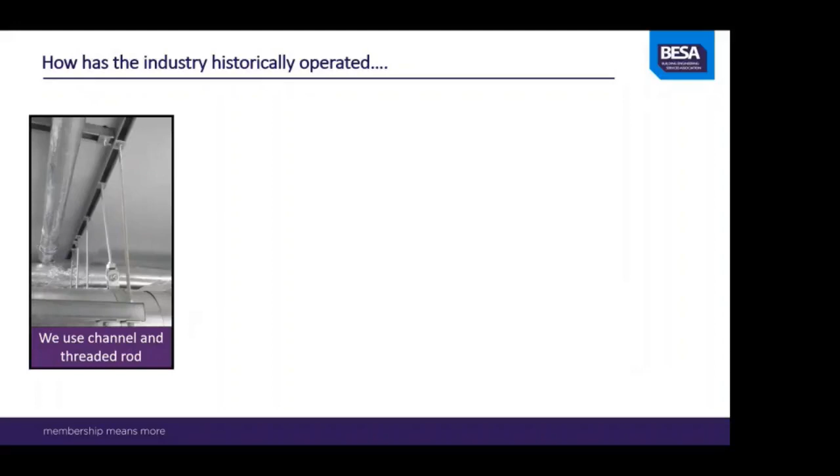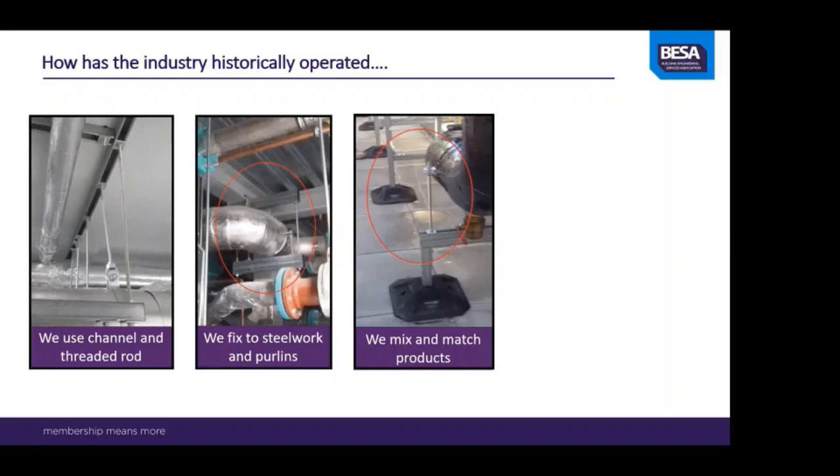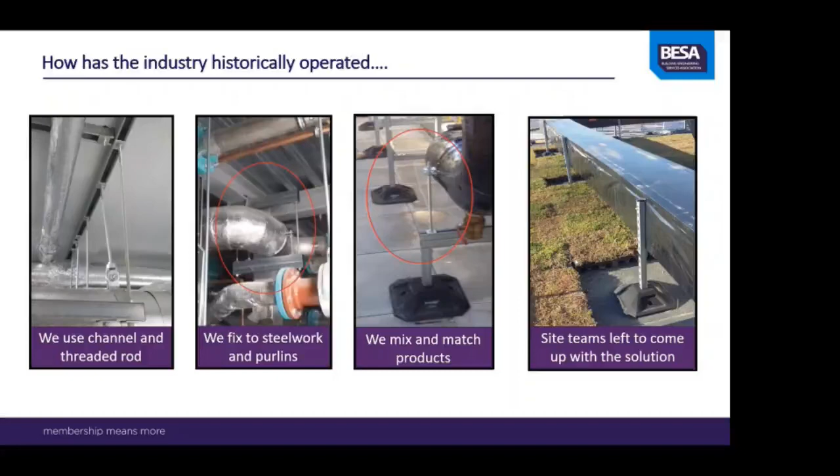We use channel, we use threaded rod. Do we understand what we're selecting and whether it's fit for purpose? We traditionally fix to steelwork and to purlins in roofs. Again, are we understanding the implications of doing that, the loads and so on? We often mix and match products without understanding whether they're tested together and what the performance of that system is. Crucially, site teams are often left to come up with solutions themselves without having the information, knowledge, or skills to make that decision.

So what does that all mean? It means we don't know what the applied load is. We don't fully understand the application. We rarely seek approval from the structural engineer, and therefore we can't prove that the selected supports and fixings, or the systems, are fit for purpose.

But you might be asking yourself, what does that matter and why is any of that a problem? Let's have a look at the reasons, or the need for change.

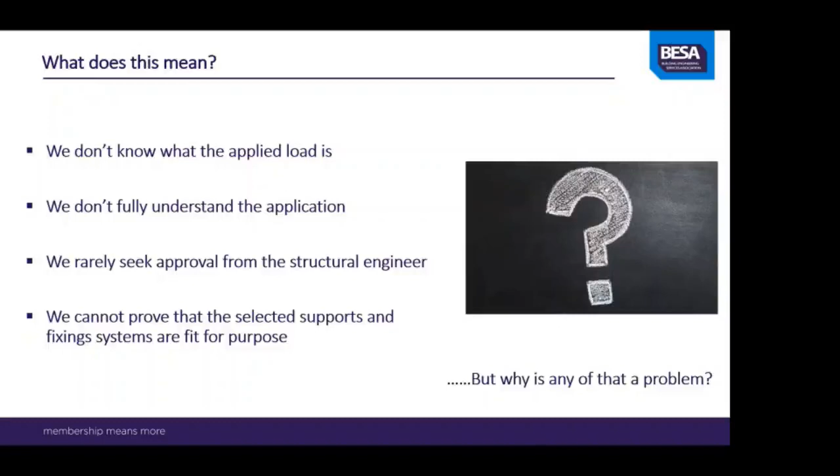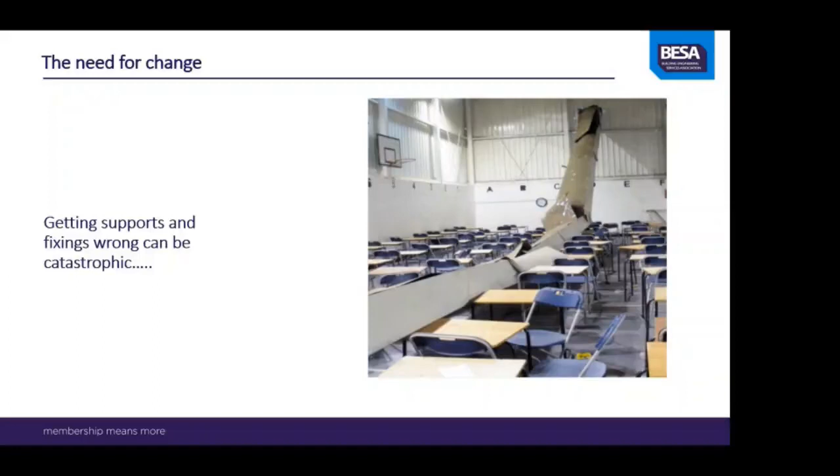Firstly is clearly safety. Getting supports and fixings wrong can be catastrophic. You may have seen this image before, but this happened back in 2009 - 12 school children were injured when a ventilation duct collapsed in a school hall during an exam.

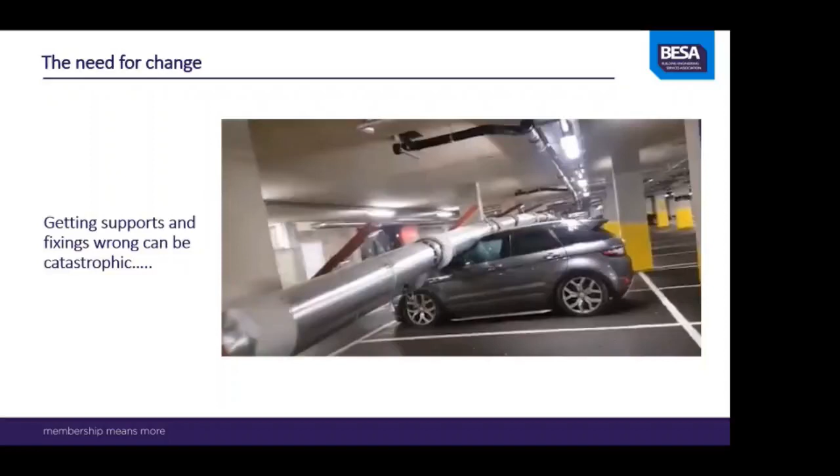The failure was later found to be as a result of inadequate supports and fixings generally. Likewise, you may have seen this image - this was floating about on social media about 12 months ago. The entire installation of a large diameter pipework system failed, and as you can see, it's caused significant damage. It was understood from the subsequent investigations that the fixings had been incorrectly selected, incorrectly installed, and that the selection was changed on site.

But why else do we need to look at change? Well, the second reason, in my view, is around the subject of cost and reputation. Clearly, if that had happened to your company or a project you've been working on, there's going to be significant cost associated with that.

But I think more importantly, the reputational damage that it would create to everybody involved is substantial. The third reason, I'd like to introduce you to a British standard, BS 8539. This code of practice has been around for nearly 10 years, and it addresses the selection and installation of post-installed anchors into concrete and masonry.

It's not just the construction industry, it applies to all sorts of sectors, but it sets out a framework for design, selection, installation and testing to ensure there's a full audit trail throughout that entire process. And that's something that is very much coming to the fore in the construction industry.

And lastly, for me, is around due diligence. If you were a client on a project, for example a data center or a manufacturing facility, you'd be within your rights to ask the contractors and design team to prove that the supports and fixings supporting, say, heavy pipework above a data hall have been correctly designed and can be evidenced.

Now, supports and fixings may not be uppermost in the mind of construction professionals during the initial design stages. However, it's important that certain aspects are addressed by the designer at this stage. It's the responsibility of the mechanical designer to calculate the weight of building services systems in order to obtain approval from the structural engineer that the building structure can support the weight of the MEP services design.

Specifically, there are two areas of this. First of all, there's suspended services. Structural slabs are usually designed with allowances for suspended services. However, there have been examples, particularly in heavily serviced buildings, where this hasn't been the case and they've actually been overloaded.

Other examples are where you've got a heavily serviced building that might be in a lightweight steel frame structure, a data center or perhaps a manufacturing facility being good examples.

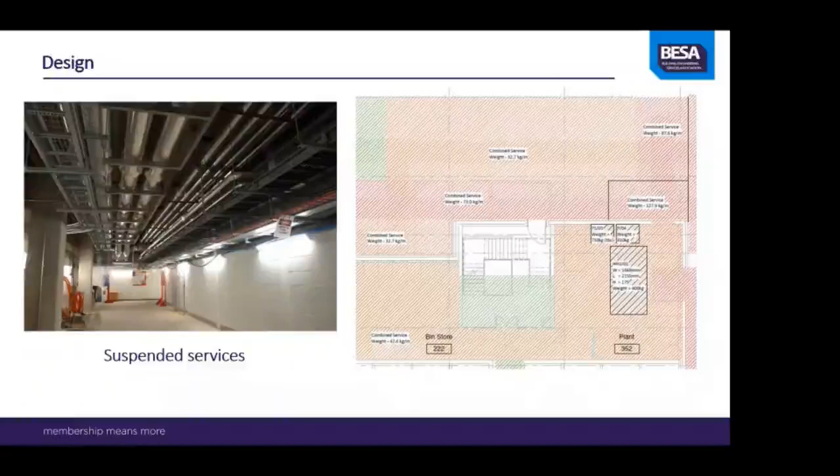And the other area of design is particularly around roof plant. So for roof mounted plant and equipment, designers should be obtaining confirmation from the structural engineer that the roof structure has been designed to accommodate the weight of heavy items of mechanical plant, including where applicable, any requirements for plinths or upstand details. It may also be necessary to restrain roof mounted plant and equipment depending on the calculated wind and snow loadings.

Now, there have been examples in the past that I've been aware of, particularly in design and build contracts, where MEP contractors have ended up taking responsibility and the structural design hadn't made sufficient allowance for roof mounted plant. And there are other examples where they've been left footing the bill for significant amounts of secondary steelwork.

So this evaluation should take place at RIBA stage 2, and no later than RIBA stage 3.

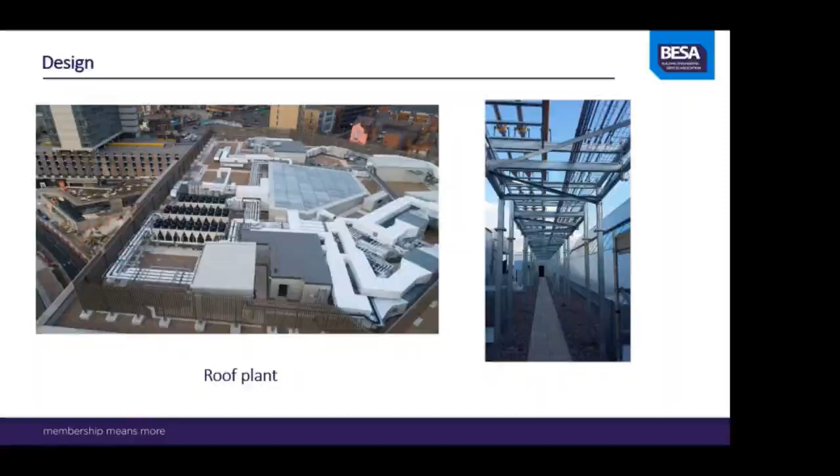Okay, moving on now to specification, and particularly the importance of the correct specification. So supports and fixings, products and systems should be specified in collaboration with structural engineers and the fixings manufacturers, to enable them to be correctly selected and specified. The following factors need to be considered.

Firstly, loading. As we've just talked about, it's really important that loading is calculated accurately by the designer. That should include things like, if it's pipe work, the weight of the water in the pipe work, the insulation, and ideally the self-weight of the bracket. I know that through the increasing use of Revit software there are capabilities to be able to do that. But it's something I think is really important, that even in a design and build project, the designer should be advising on the weight of the services.

The next issue is base material suitability. Now, BESA TR50 provides guidance on this, and it includes areas such as a definition of cracked and uncracked concrete, what that is, fixings to purlins, and also fixings to composite metal deck floors.

Environment is another thing that needs to be taken into account. So certain environments, good examples being swimming pools, external plant areas, any building near the sea, or perhaps in a tunnel, you're going to have enhanced corrosion requirements, and that needs to be taken into account when you're specifying the support and fixing system.

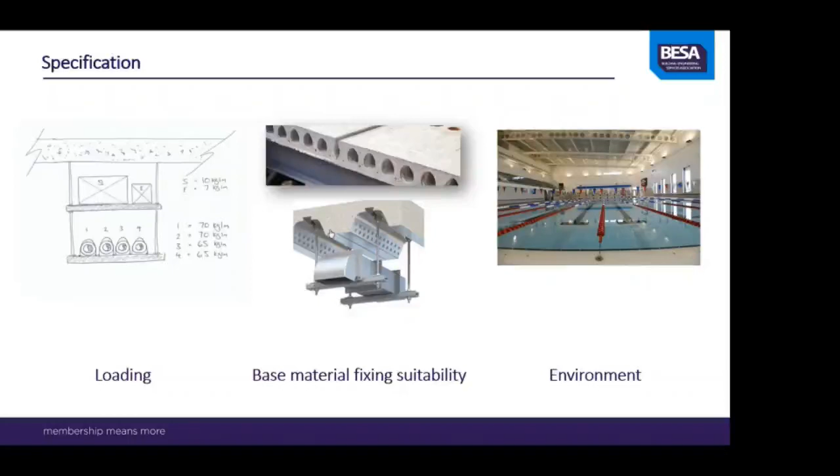Now, the next thing in terms of specification is the subject of fire rating. For specific applications, it may be a requirement to ensure that supports and fixings are specified to be able to withstand a prescribed fire exposure, period or rating.

Now, this is touched on in the guide, and it's very much an evolving subject in the industry at the moment. There isn't a single specific UK test standard that covers fire ratings of supports and fixings as a single entity. There is guidance that talks about the fixings or the anchors into the concrete, and guidance in relation to the drop rods, but there's nothing that talks about it as an entire system. That's something I think is desperately needed, and certainly at BESA we will be looking at that over the next year or so.

In TR50, it does give some best practice examples of where fire rated supports and fixings will be required, and provide some considerations and watch points.

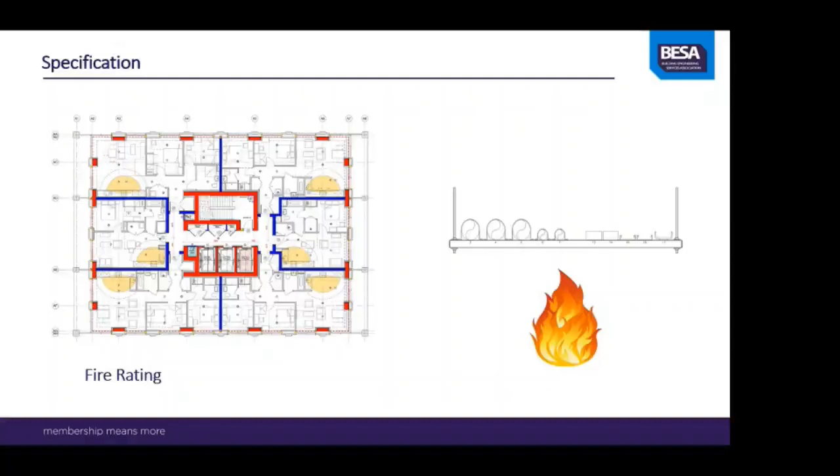So these include, firstly, supports for power supplies to life safety, firefighting and other critical applications. You may be familiar with BS 8519, which has a requirement that the supports for life safety power supply should have a survival time equal to that of the cables it supports, for the same defined fire conditions.

Now, there are two options for approaching this. You can either split out the life safety supplies into a separate containment system, as shown here, or if it's a single module, which is commonly used in DFMA processes these days, you would need to look at providing a fire rated support and fixing for the entire system.

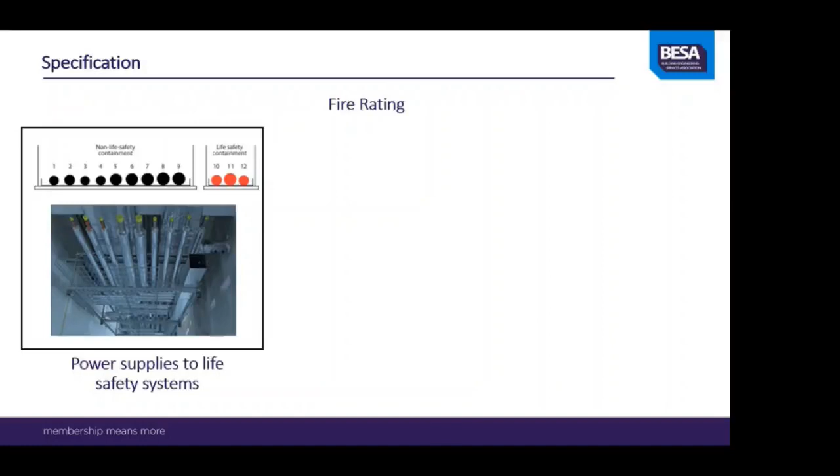The second area is supports either side of penetration seals. So fire stopping and service penetrations either side of compartment walls should always be part of a manufacturer tested and approved fire stopping solution. That will have a requirement that the support either side of that, typically no more than 500 millimeters, should be fire rated as well.

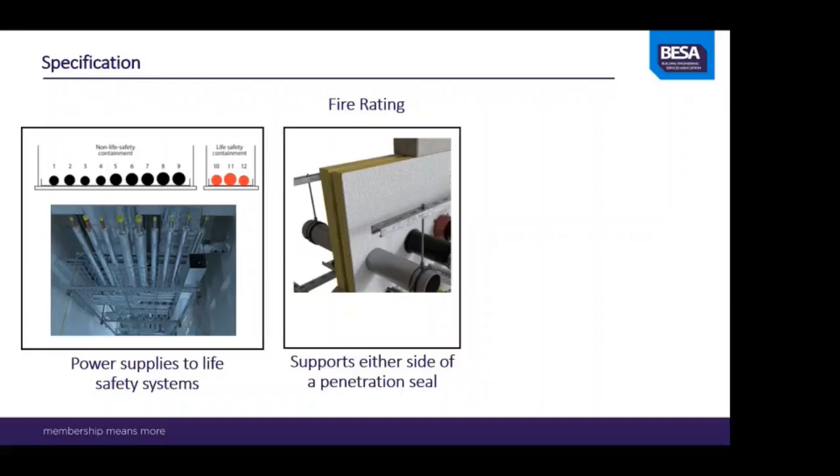And the third area of fire rated supports and fixings is designated fire escape routes. So for example, if you've got a fire escape corridor that has a 60-minute or a 90-minute fire rating.

Now, this is very much a contentious area because there is a school of thought that says if you've got a designated escape route and you've got services in the corridor above that, then by definition, there will be no fire load in that escape corridor. Therefore, why are we looking at fire rating the supports and fixings? And I think the key message here is it needs to be looked at on a project by project basis, and it may well be that you could come up with an engineered approach.

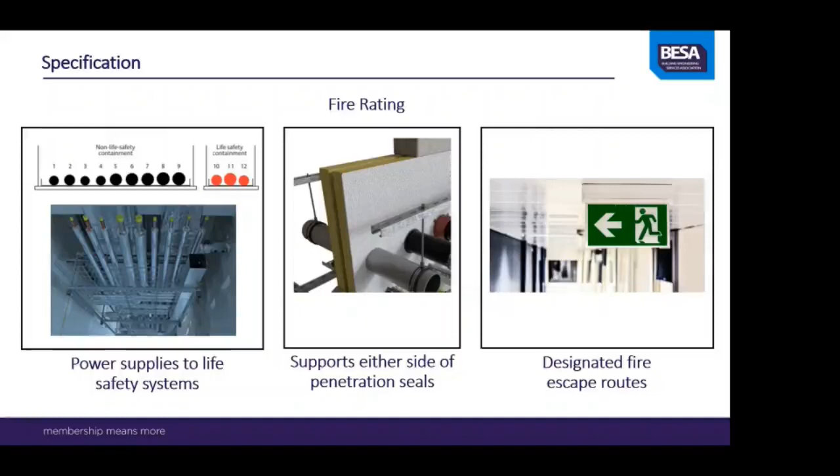Okay, so moving on to support spacing. Particularly for pipework and ductwork services, the spacing should be provided in line with manufacturers' recommended support distances. So in the absence of any specific information, vertical and horizontal supports for copper and steel pipework can be based on BESA guidance in TR50, and ductwork would be DW144. So where you've got a multi-service bracket, the support spacing should be based on the service with the most onerous requirement, which typically might be a copper pipe.

Thermal expansion. Now, in addition to static loads, pipe movement as a result of thermal expansion and contraction may also impose additional active loads onto supports. And that is really very much dependent on the pipework expansion design strategy, but it's something that may need to be thought about when you're looking at the support and fixing system.

And finally, in terms of specification, is the subject of approvals. Now, BS 8539, the concrete specification we talked about earlier, has a requirement that wherever possible, ETA rated anchors should be used for any fixings into concrete. Now, ETA stands for European Technical Assessment, and essentially this is a harmonised standard which is used by all reputable fixings manufacturers. And as part of that testing process, they've tested their fixings and anchors into various substrates, and they're therefore able to publish the performance data for those particular anchors, and that should be used as part of the selection process.

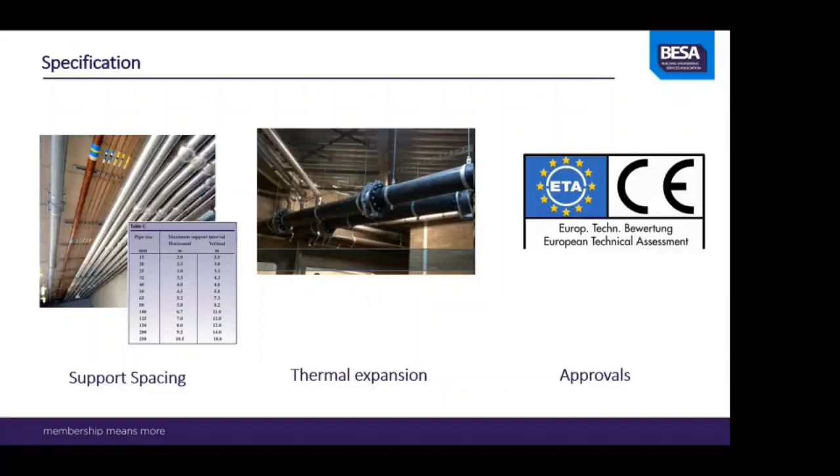Moving on to installation. Now, this may not be something that as mechanical designers you necessarily get involved in, but I think it's important to have an awareness of this subject. So it is essential that installers undergo manufacturer-specific training before work commences. This may take the form of a toolbox talk on site, although some fixings manufacturers have developed very good online training videos.

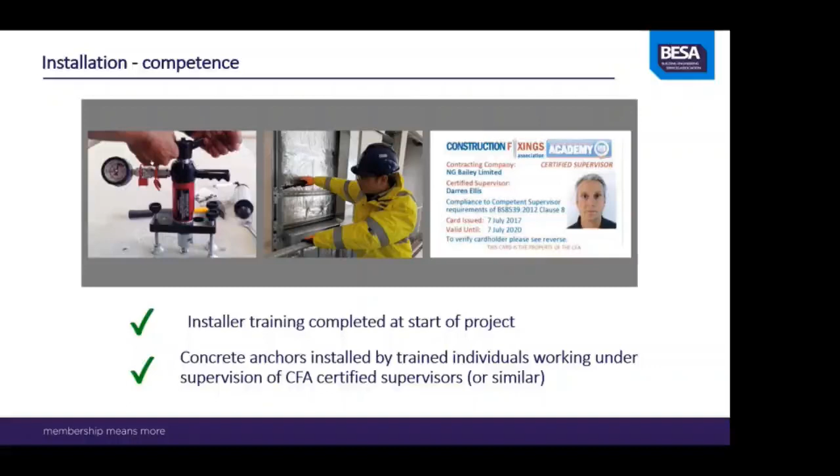Now, for fixings into concrete specifically, again, referring back to BS 8539, it's a requirement that all anchors are installed by trained individuals working under competent supervision. Now, in order for somebody to be deemed competent, according to the 8539, they should have undergone and completed a competent supervisor training course, such as that delivered by the Construction Fixings Association, as you can see on the screen. Okay.

Now, sticking with installation, I wanted to talk about torque settings now. Many of the support and fixing systems used in building services actually have specific torque settings that will be specified by the manufacturer. Now, this isn't, in my view, something that the industry has done at all well. If you think of the automotive industry, or if you're a cyclist, you'll know about road bikes, and there'll be specific torque settings for different components. And essentially, why should our industry be any different?

So examples of products that have specific torque settings include beam clamps, channel nuts that are used on framing systems and trapeze rods, fixings to purlins, beams and metal decks, and torque controlled fixings into concrete. And it's important that when these are installed, it is evidenced that these have been torqued to the correct setting.

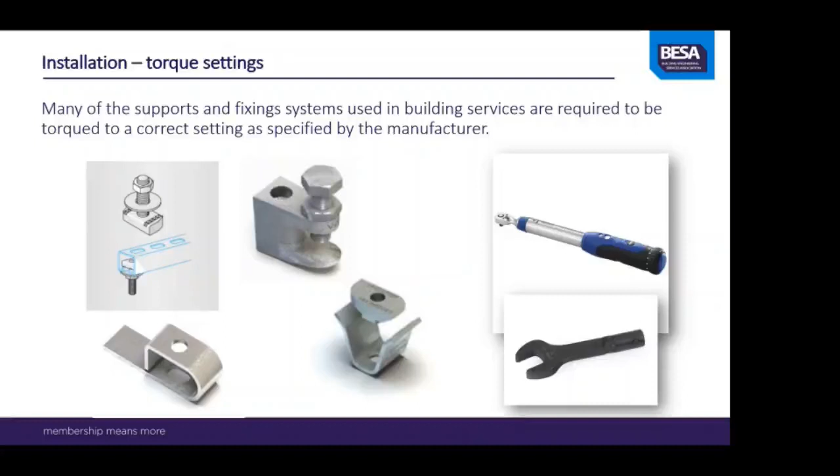Okay, now we've selected the fixings properly based on the loads that have been calculated. They've been selected based on ETAs. They've been installed by trained operatives working under supervision. Now we come to the testing.

Now, the key point here is that there are only two types of fixing test, and that is one, a proof test, and two, a preliminary test. You may have heard people in the industry talk about a pull test being used, and the advice is that that shouldn't be used because it's generally misunderstood and too vague. So proof test and preliminary test are the two terms that should be used. So what are they?

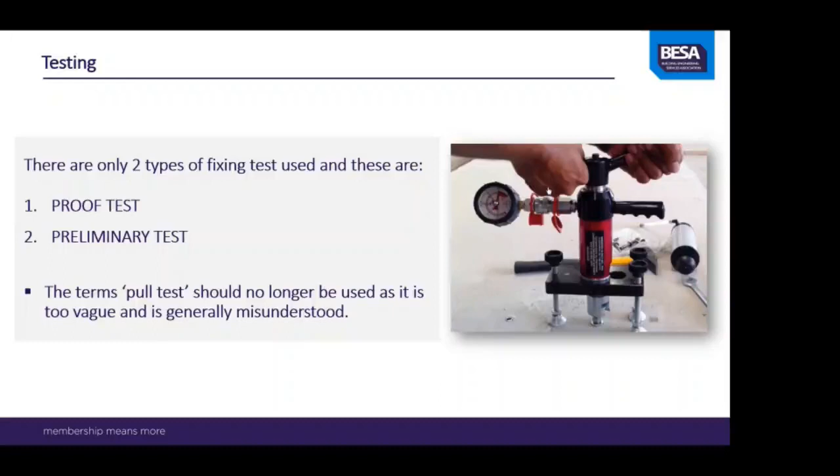A proof test essentially is only there to validate the quality of the installation. So as I mentioned already, if you've gone through that process of being able to demonstrate that it's an ETA approved anchor that has been selected based on a calculated load, it's been installed by competent individuals working under supervision, if you've got that audit trail, there is no need to even carry out a proof test. However, if one is required on site, a proof test is only there to validate the quality of the workmanship.

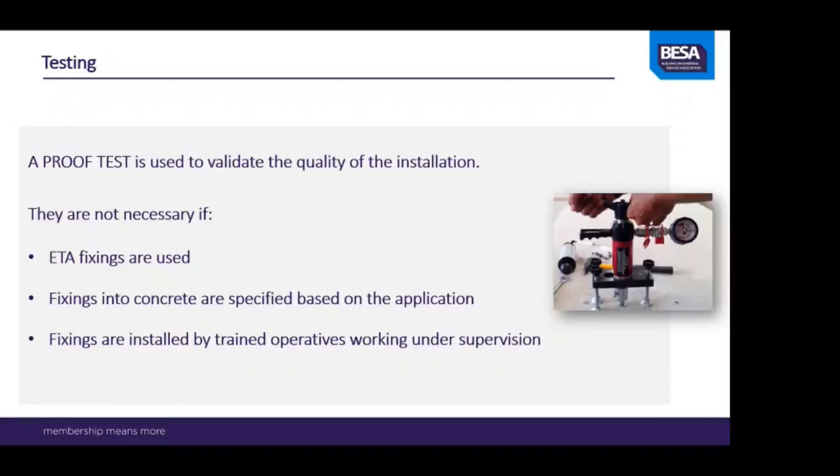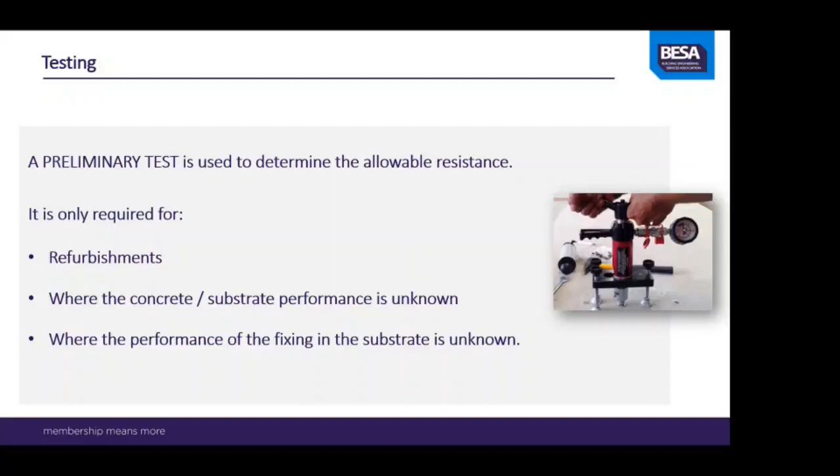A preliminary test, on the other hand, is something that is carried out on site to determine the allowable resistance, otherwise known as the maximum working load. And that would be used in a case where there isn't any characteristic resistance or recommended resistance available. So a really good example of where you would carry out a preliminary test would be in a refurbishment project where the concrete performance isn't known. So you would test that fixing to destruction to determine the allowable load. Proof test, preliminary test, two terms, two forms that should be used.

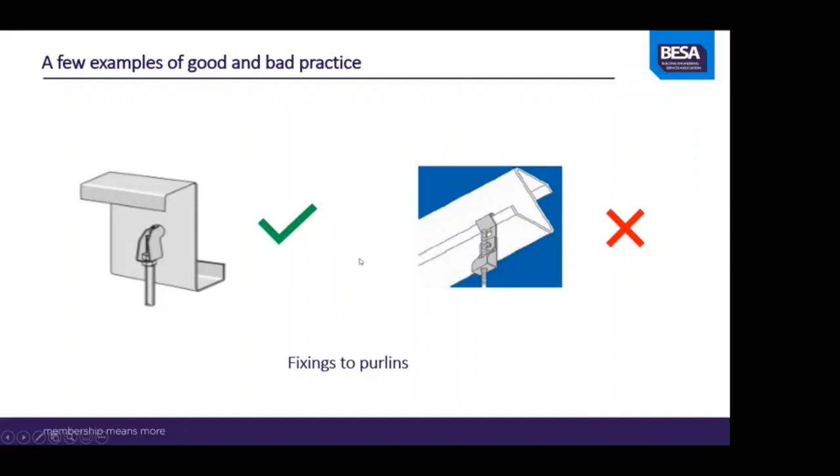Just to finish off then, I've got a couple of examples of good and bad practice that are in more detail in the guide. The first example here is fixings to purlins. Now, purlin clips should be avoided unless permission to fix them has been obtained from the purlin manufacturer and also the project structural engineer. Subject to that approval from the structural engineer, the preferred fixing mechanism is actually to drill through the purlin itself. Hanging anything off the purlin lip should be avoided because the loads will be minimal and anything other than a light fitting just won't be taken.

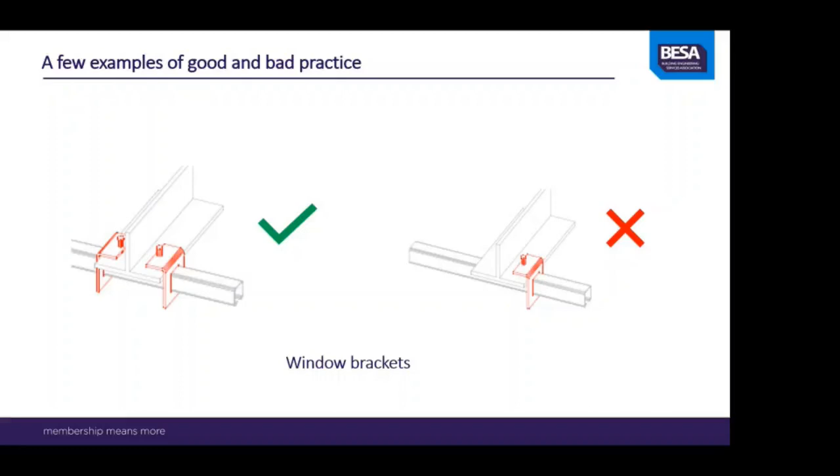Window brackets, another good example. We see this a lot, particularly in large steel frame buildings. You often see a single window bracket used, and that is unacceptable. Wherever that is the case, there should always be one either side of the I-beam.

And finally, overloading of fixings. So when you're designing brackets, services should be evenly distributed as possible through all supports and fixings. And also services hung on the bottom of other services, that parasitic load should be avoided because it can create cantilevers and multiple forces acting on that bracket and lead to potential failure. So it's all about being able to demonstrate that what is installed is based on a designed process, and you can demonstrate that as well.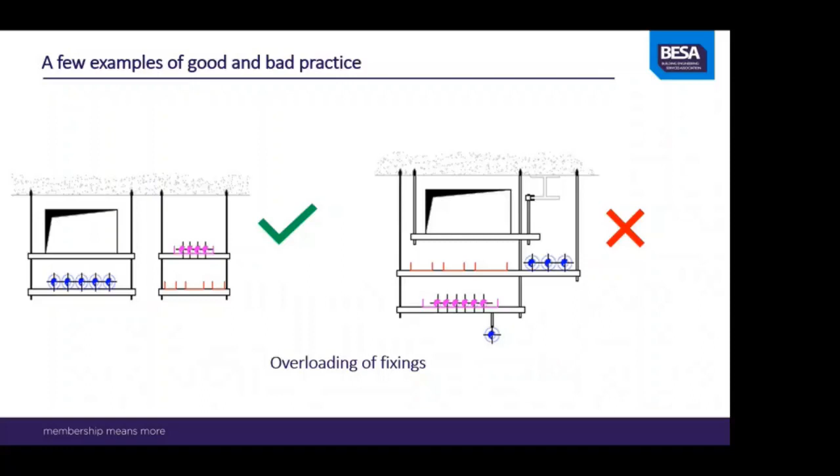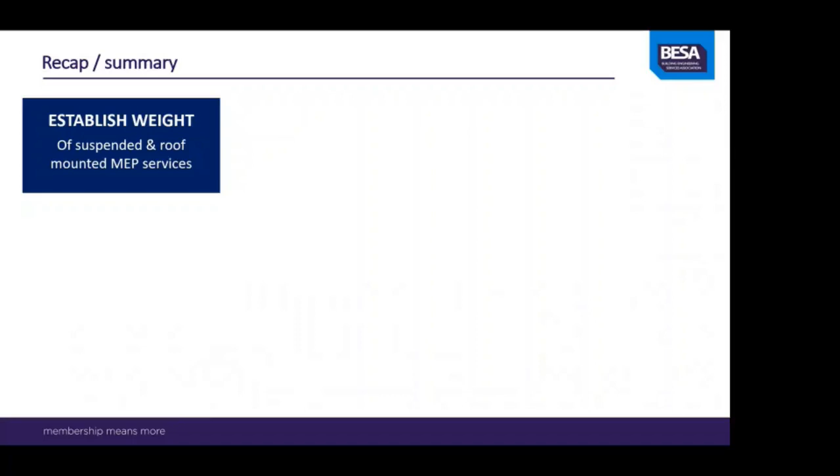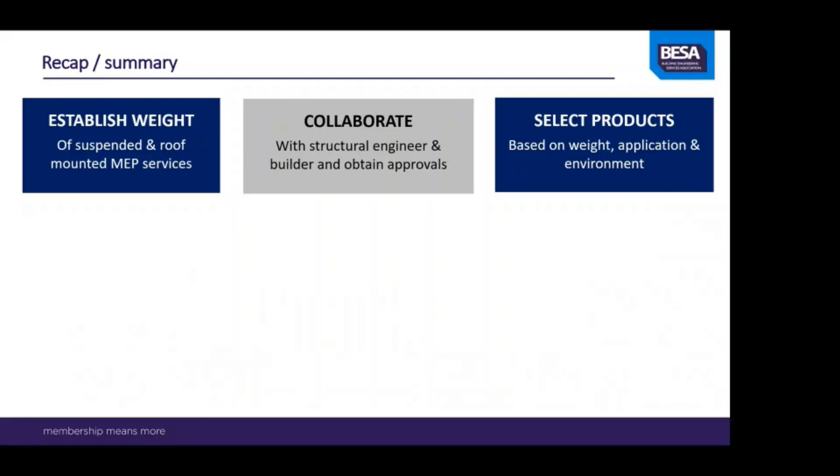So just to summarise, we've gone through quite a lot in a short period of time. We should be establishing the weight of suspended services and roof mounted MEP plant, and that should be carried out by the designers. We should be collaborating with the structural engineers and the builder to obtain the approvals that what we're doing is acceptable. Products should be selected based on that weight, based on the application, and also based on the environment that we talked about earlier on.

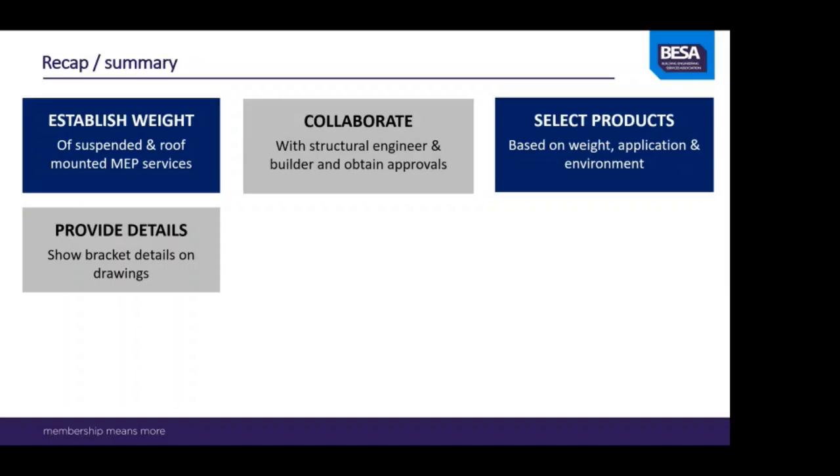Now, this is a really key point. Details should be provided on installation drawings on the bracket design. This is a bugbear of mine because in general this isn't done, but we need to get back to a point where this is done. For those of you that were in the industry pre-design and build era, 25 plus years ago, a consultant design would typically show bracket details. Now, I'm not saying we're going to get back to that, but as an industry, we've got to get to a point where more detail is shown on drawings to enable those on site to install as per the drawing.

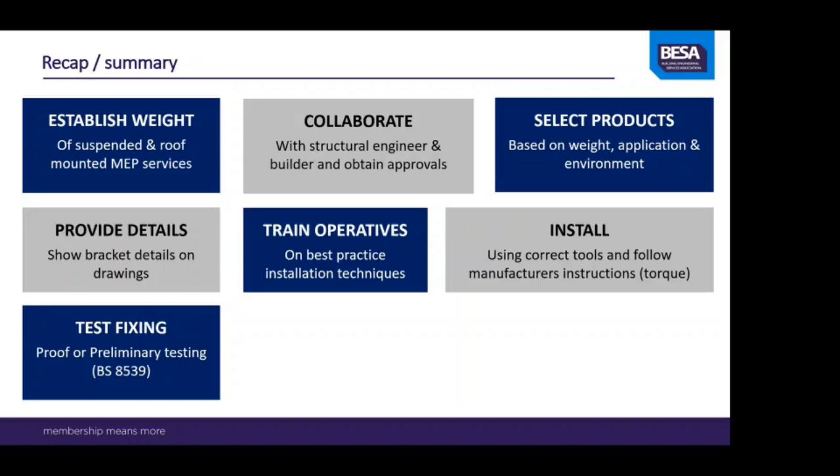Operatives should be trained based on best practice installation techniques. We should only be installing using the correct tools, following manufacturer's instructions, including torque settings. We should be testing the fixings based on 8539, so a proof test or a preliminary test, depending on the type of application. Is it a new build or a refurbishment?

Excuse me, it's my phone ringing.

And finally, just to conclude, supports and fixings are not commodity items. They need to be designed and engineered from the outset and not left to those carrying out the installation to come up with solutions.

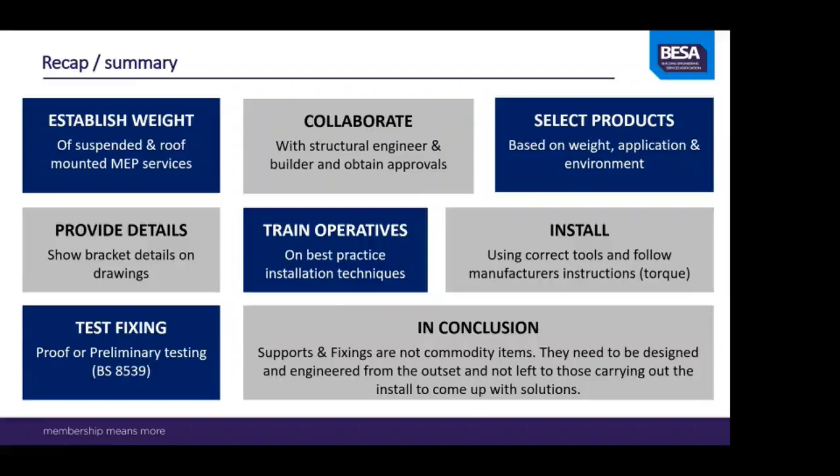More information on this whole subject is covered in BESA TR50, Supports and Fixings, which can be downloaded from besa.com knowledge, or it is now available on IHS. If your company subscribes to IHS, it is available on there.

Hopefully that has been a good introduction to the whole subject for you. And any questions, I'm more than happy to take them.